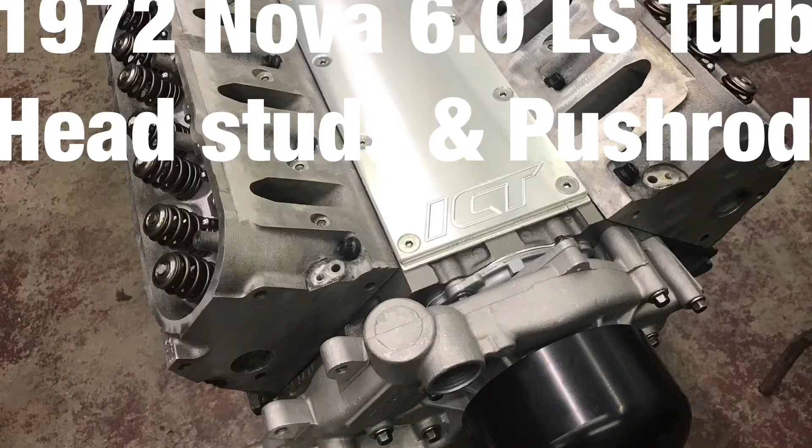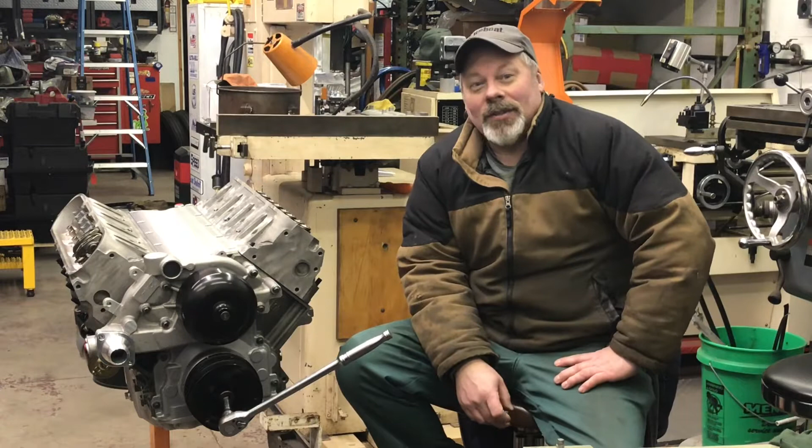Sean here, Mountains Garage, still working on the 6-liter Turbo LS project. The first week, I really thought I was getting it done, and now it's kind of dragging out. Having to do another set of heads certainly slowed me down. But I can't step too far off the path of doing it to the best of my ability.

So after we did the valve job on Sunday, the heads were still dirty. I came out yesterday afternoon, and in 3 hours, wire wheeled the heads, cleaned the gasket surfaces, chased all the threads, cleaned them again, ran them in the ultrasonic parts cleaner in every possible position you can think of, dried them off, sprayed them with carb cleaner, dried them off again, and when I went inside the house last night, I was ready to assemble the heads.

Finally. I got a little carried away today, and I went ahead and assembled the driver's side head, and I got it sitting on the block with the gaskets over the studs with just one nut holding it on. Traditionally, I check the number one cylinder because it's easiest to know what top dead center is. That's how I check my piston to valve clearance. But again, I got carried away. This side's all assembled and bolted on. It would only take me a minute to pop the springs back off, but I just decided to check the other side. It all ends up the same. So let's go over the figuring I've been doing.

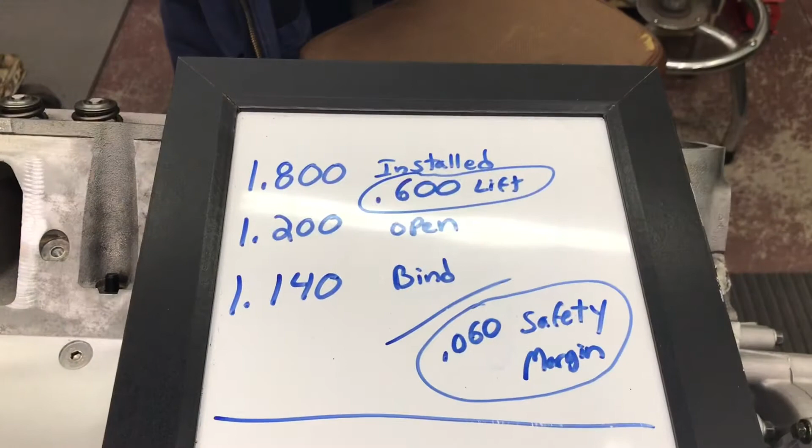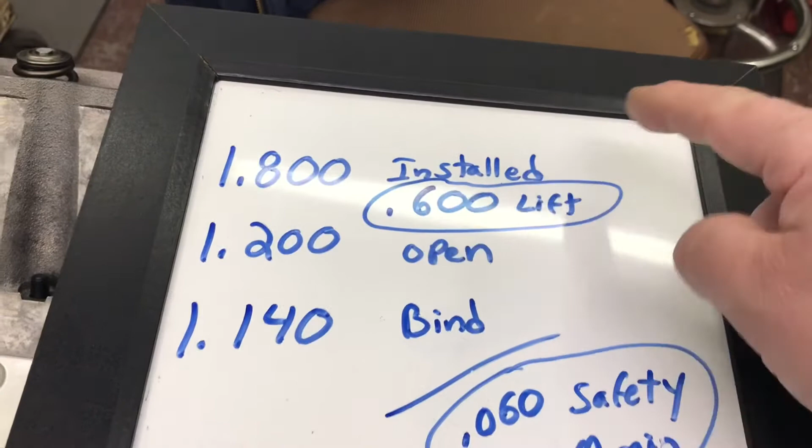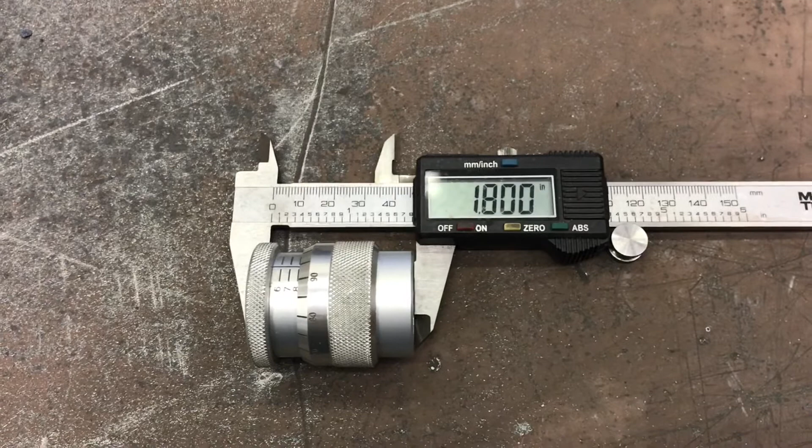Final assembly of the heads using my PAC 1218 valve springs. That's the part number, 1218. Their maximum lift that they will accommodate is .600. I should have written it up here, but we'll have to go with it. They recommend a 1.800 installed height. And after my valve job and my slightly thicker seat on my new valve seals, I'm at 1.800 exactly. This actually reads 1.795, but I always check it with another device because I'm not sure I trust this entirely. It has a pretty coarse thread, and I'm at 1.800.

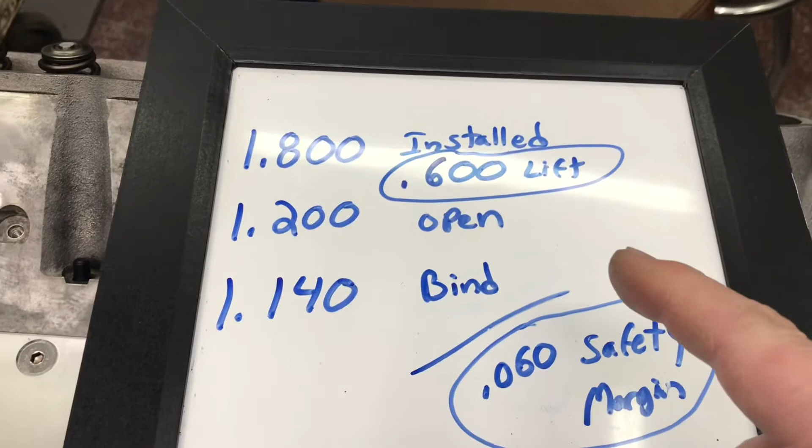So if I had .600 lift, it would be open at 1.200. It would bind when the springs touch and bad things happen at 1.140. So I have a 60 thousandths safety margin if I had .600 lift. I only have 585 thousandths lift. So all the same math, and I have a 75 thousandths safety margin. I am more than good.

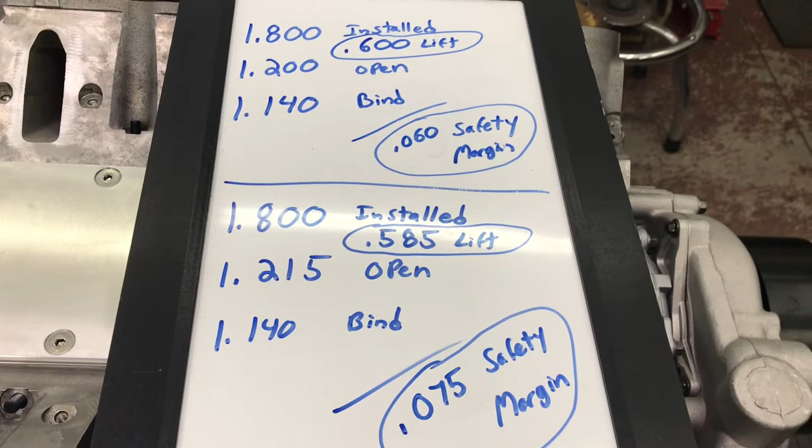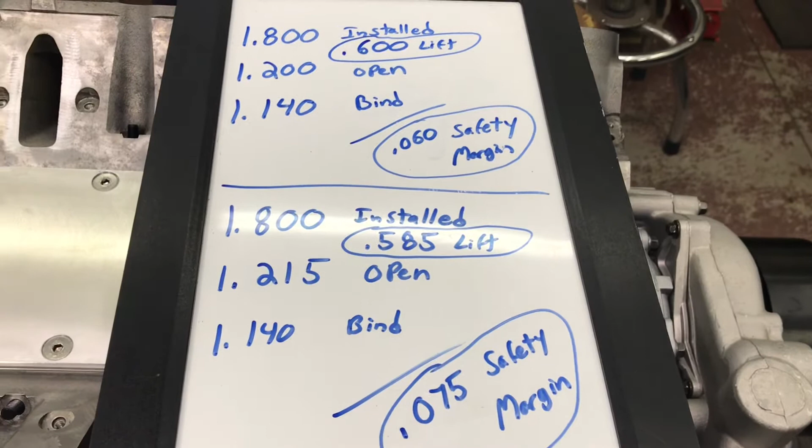With valve springs, it's very important to run the least amount of spring possible. Now I know very little about valve springs. I know enough to do the math and assemble things the way I always have. I have a friend, Tom Vigu, 3V Performance in North Carolina. He spent, I don't know how many hours, working on a machine called the Spintron. And he knows things about valve springs that I'll never even understand. Because that machine electrically runs the top end of the motor. It can measure harmonics, and they can run some pretty serious lift with some very minimal valve springs that have great longevity. That's how these NASCAR cup motors and etc. go so many miles without blowing up.

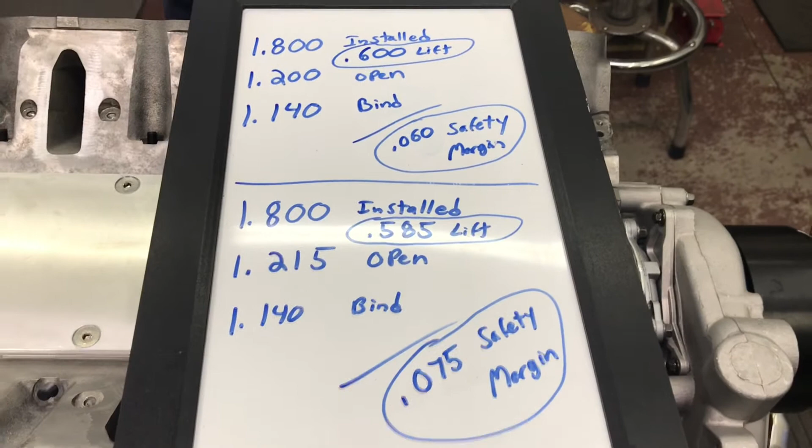We've come a long way in valve spring technologies thanks to machines like the Spintron, and it trickles down to us. And the Beehive spring is a nice spring for all the reasons stated, but I only know enough to do the math, and there's very smart people out there that can help you if you need it. They're called a Beehive spring because they taper at the top, and they kind of look like a beehive compared to a traditional valve spring that's straight.

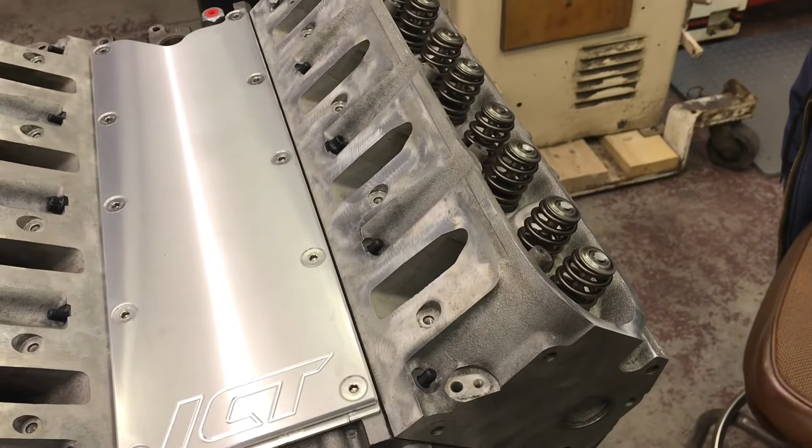When I assembled the driver's head a few minutes ago, I lapped in the valves, and unlike the experience with the 862 heads where when you first start lapping in a set of valves, it sounds really gritty. It takes a long time for it to get quiet. If you know what I'm talking about, you know what I'm talking about. Instantly, when I spun these valves with my drill, they went from gritty to quiet, and they made a perfect witness mark all the way around each one, halfway down the ground part. I mean, it's perfect. And everything worked out for the best, and my installed height ended up okay.

I did cut, I didn't film it, but on the other end of the valve grinding machine, I cut 1.5 thousandths off of each stem. So it shouldn't affect my preload, and it should be good to go.

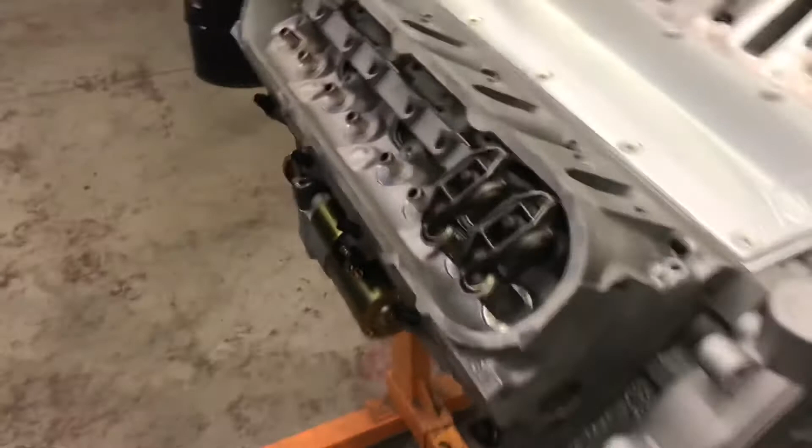So I'm installing a version of the Sloppy Stage 2 camshaft, the world's most popular LS drop-in camshaft. I can guarantee 90-some-odd percent of the people never check piston to valve clearance and don't have any trouble. I have all these tools. As I said before, I'm going to go through the steps to the best of my ability. I just won't sleep at night otherwise. So I put my checking springs on this head, and I have the head installed with no head gasket.

I like to make sure I have clearance without it. And once I add the cylinder head gasket back in, I have that much more clearance to go by. If I checked it and it was really tight or questionable, then I'd have to add the thickness of the head gasket into my safety margin, which most people say 60 thousandths is about the minimum you'd want, and 100 is pretty normal. So somewhere in that range, if I was close, which I'm not, I just checked it, but if I was, I would add the gasket and redo this whole thing again.

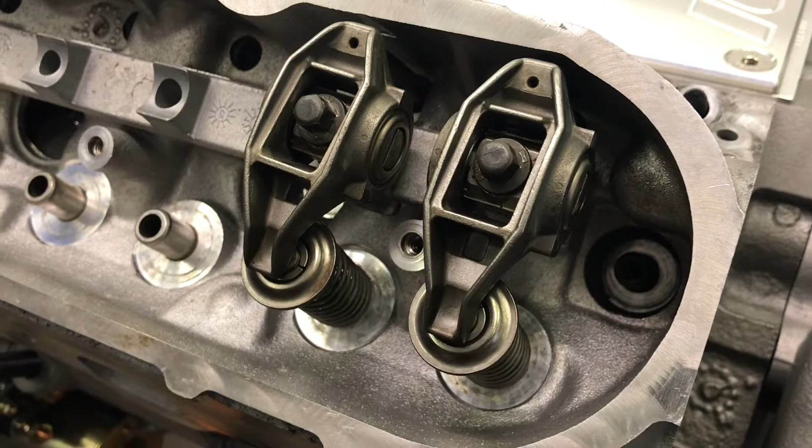I don't have a solid lifter for an LS motor to check piston to valve clearance with, but I effectively created one when I went ahead and soaked the lifters in oil for about a week before I installed them. A lot of people say you shouldn't do that because it makes it hard to check lifter preload. But in this case, it works out well because that lifter is very solid and it easily compresses the checking spring. Of course, the LS has a non-adjustable valve train, so when I'm checking piston to valve clearance, I just set this to 0. When it starts to compress the spring, I'm going to call that 0, and I go ahead and check piston to valve clearance using that method.

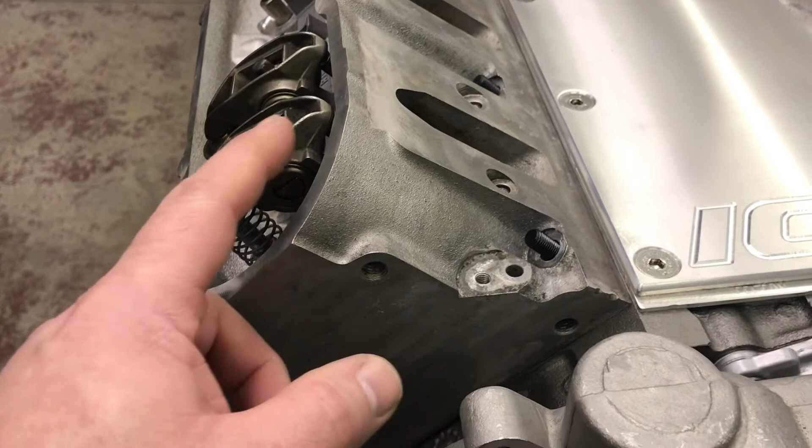When it comes to actual piston to valve clearance, I simplify it as much as humanly possible. The only time these are going to interfere with the piston is when they're moving. So I rotate the engine slowly with my checking springs, and as soon as it starts to crack, either one, exhaust or intake, it's the intake, but it goes that direction. As soon as they start to move, I just start seeing how much clearance I have between that and the piston. As the piston chases the exhaust valve up and the intake valve starts to chase the piston down, I just run it through its travel. You can go backwards and forwards if you're unsure what you're measuring, and see what's going on.

It's more hands-on. There's a lot of other methods you can use. Clay, there's at least 10 ways to do it. I'm not sure how many, but this is what I do, and it works. I like to feel what's going on, and if it's questionable, then I will actually measure it or come up with different methods and double check myself. But in this case, again, I'm installing the world's most popular turbo LS cam and the world's most popular motor at this point in time, and it's got plenty of clearance. So in my head, I'm satisfied that I checked it. So now I'm going to put the head gasket on this head, set it back on with the checking springs, and I'll show you what I do for lifter preload checking.

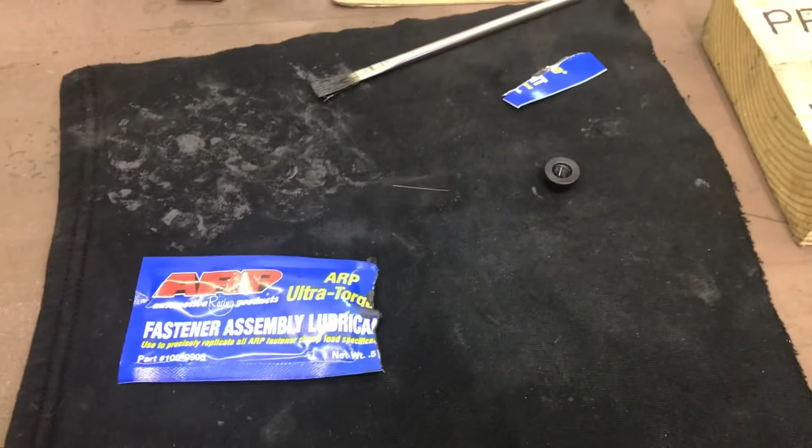Well, I thought about it overnight, and before I went too far off the beaten path with my crazy methods of checking lifter preload, I decided just to check it the traditional way. So I went ahead and assembled the other cylinder head with the new springs and installed them both on the block for the final time with the eBay studs. But I do treat the cheap studs to the good ARP assembly lube. In the ARP instructions, when they use their own lube, the torque setting is actually lower. So taking all that into account, and there's already volumes written on the internet about different torque settings and which is better and reusing torque to yield bolts. You can research that for yourself. But some smart people have actually tested how much it takes to break these.

And knowing what I know, I lube both sides of the washer, and I torque them to 65 on the big ones and 25 on the small ones across the top. And I do that incrementally. I sneak up on it. And after about 35 pounds of sneaking up on it, the washers stop moving. There's no spooky feelings. They torque right up nice. No complaints whatsoever. They're $50 studs and they work pretty well.

My only warning, and it has nothing to do with the studs, other than they have a nut and a washer, is the inside ones. I go ahead and put all the fasteners on both heads all lubed up, because when you're setting them in the hole, I use needle nose and set everything in there. If you drop that, it's going down into the abyss and you got to go digging for it. So I would hate to have a head bolted on and have to take it off to go looking for it. So I just get all the hardware in place and then I start my torquing procedure.

The beauty of an LS and a flaw is there's only 10 big head bolts to torque down. It'd be better if each cylinder had 6 bolts instead of 4, or some combination thereof, but in this case you're only going 10 and then increasing the torque, and then 10. It's pretty simple. Working in a crisscross, big circle, working toward the outside. That's all I got to say about that. It's a cheap motor with cheap studs. Nothing scary. Everything went together just fine.

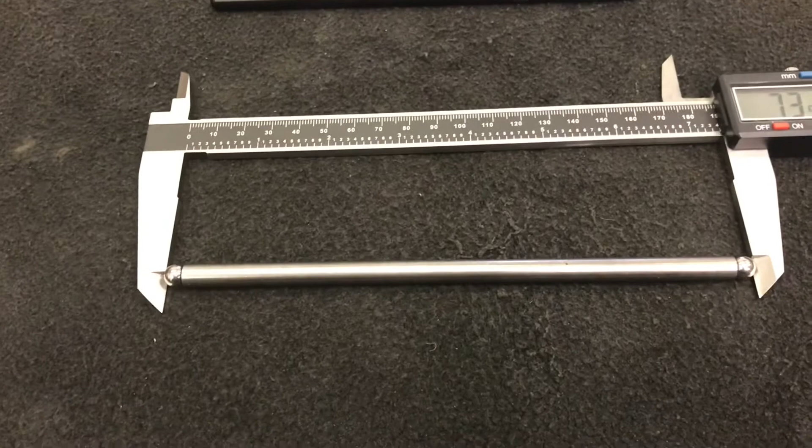The Elgin push rods that I got in the lifter kit, they're made in USA. They're good quality. They are 75 thousandths wall. They are the ball type, not my favorite. I'd prefer if it was like these. This is my adjustable length push rod. But at only 585 thousandths lift, that's not crazy compared to 8 or 900 that I'm used to on a big block Chevy. So I think in this application, these will be just fine. If they're not, well, I'll be the first to know.

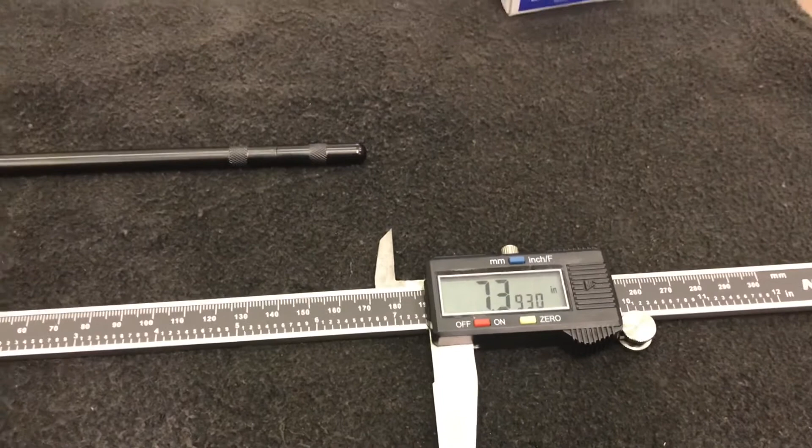On the Elgin site, they're listed as 7.393, and that's exactly what they measure. Online, these were sold as 7.400 length push rods. A lot of people round up, so don't assume that you have a 7.400 push rod unless it's printed right on it by Crane or somebody like that who makes it.

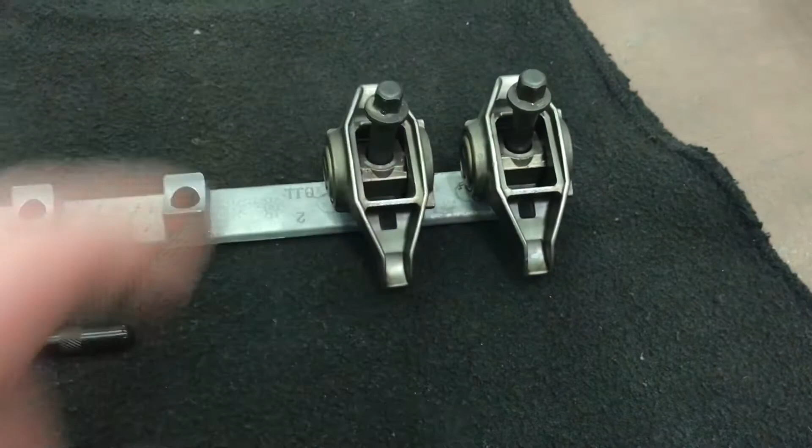So lifter preload. This is a non-adjustable valve train, so when I tighten that bolt down tight to the head, I'm going to depress the plunger a certain amount. I'm shooting for around 50 thousandths. Cam manufacturers will tell you anywhere from 20 to 100, depending on how much oil they think the lifter should contain while it's running, depending on RPM range, whatever. We're shooting personally today for somewhere in the 50 thousandths range.

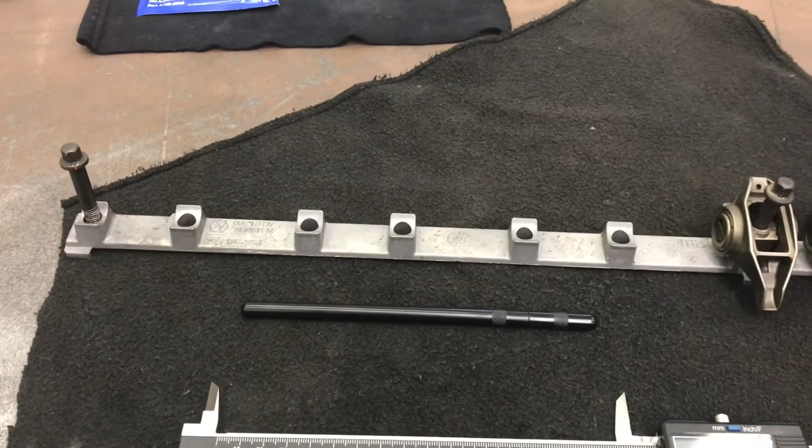If I just went ahead and bolted that in, I'd have no way of knowing how far the plunger went down. So I'm going to start with the adjustable length push rod about 50 thousandths too short. And if I can bolt the rocker arm up without it getting tight before the bolt's tight, which means I'm depressing the lifter plunger, then I'll be able to keep adjusting this until this goes down at 0, let's call it. And then the difference between this and this will be my plunger preload.

If I was going to order push rods for the ideal pie in the sky setup that I wanted, I would do the same procedure, just get this in, so when I tighten that, it's not depressing the plunger. And then I would just add how much preload I wanted, 50, 60 thousandths onto the length. So in this case, I have a push rod that I want to use. And if it falls in a range anywhere around 50 thousandths, it's going in the motor.

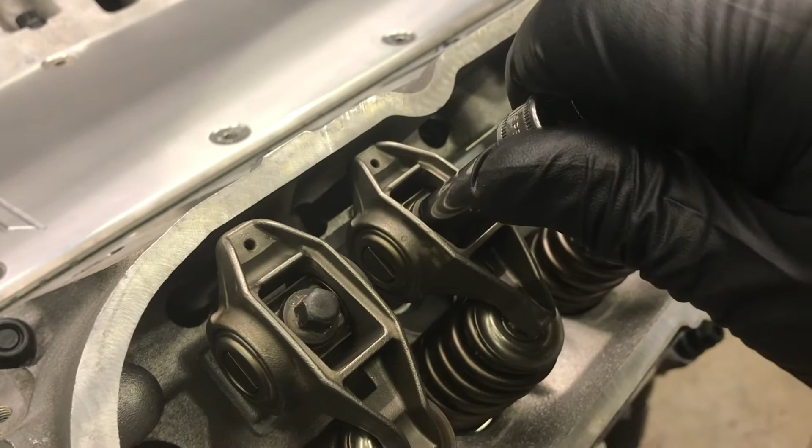You need to be on the base circle of the camshaft to measure the push rod length and preload. So just like you would with an adjustable valve train, I rotated the engine until the intake was fully open and started to close. That puts the exhaust in the checking position. And then I manipulated the push rod length until I'm just at, if I back it off, I got play. That's tight. I got nothing. I can actually feel the preload, but I'm at 0. I'm not pushing at all with that tight, but everything's tight. There's no lash. Now I'm going to measure the length of the push rod and compare it.

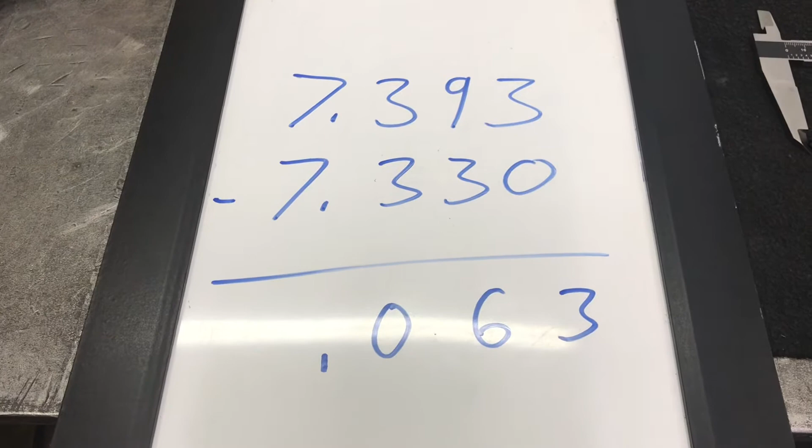Final results, I'm at 7.330. A little quick math, that's 63 thousandths preload. I'll take it. A little more than I was ideally looking for, but it's a really big margin. So that's in the range. It'll fly. She's going together.

Forgive me during that last segment when I kept saying the plunger in the push rod. It's in the lifter. I have push rod on the brain because I was talking about push rods. I made a mistake about 5 times.

So the last thing I accomplished for this video, I blew out all 16 push rods with brake clean and then air because I don't trust that they're clean even though they're new. And I lubed the ball on the downside and shoved them all in. That's going to do it today.

I got about a 1-minute montage I'm going to stick at the end. It was a beautiful day today. 56 years ago today, just before breakfast, I was born. It's my birthday and it shot to 50 degrees. Yesterday morning I was plowing snow. Today I'm outside playing and stuff. And I was moving vehicles around, doing some fun stuff. So if you want to watch it, go ahead.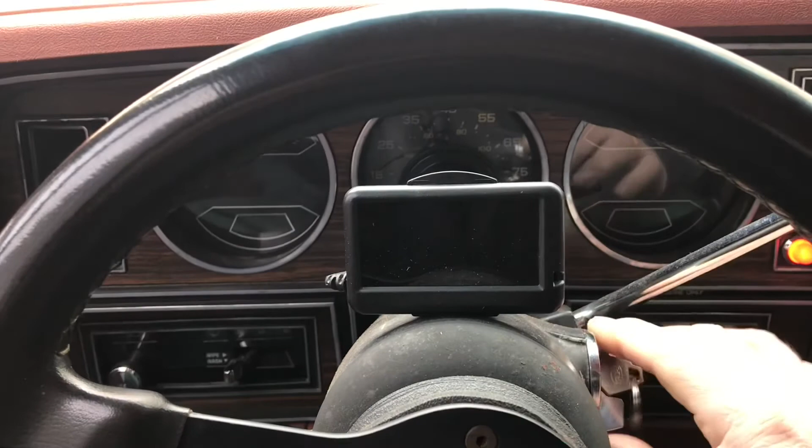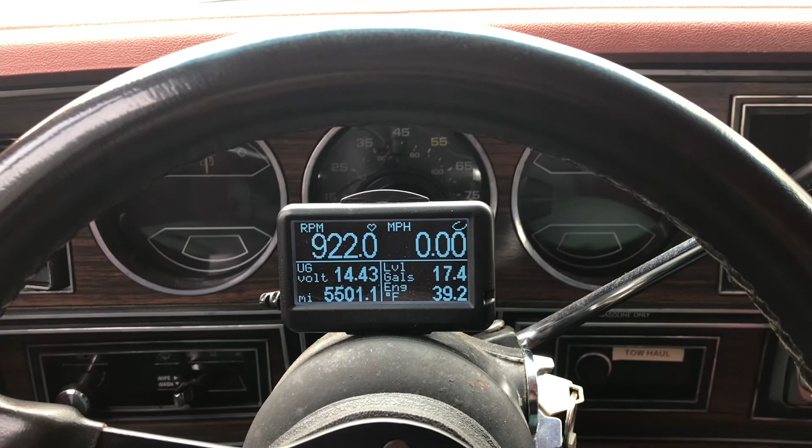Top of the snowbank. Let's fire up the old Dodge. Fuel pump. Just like that. I'm going to drive up to the mailbox. We'll see if the engine starts knocking. If it is, I'll bring you back. Piston slap. Yep, here. Goes away in about 45 seconds.

The Suburban's only two-wheel drive, but I think she'll come out of there. Let's see if it runs. Yeah, Suburban was a little bit frozen in, but we got her out. Got some cleaning to do. Little cleanup. I was cleaning off my best friend who gives me a lift every now and then. I broke the pallet.